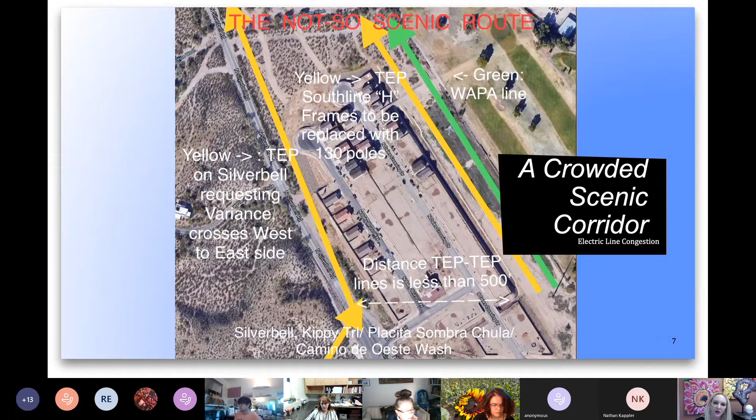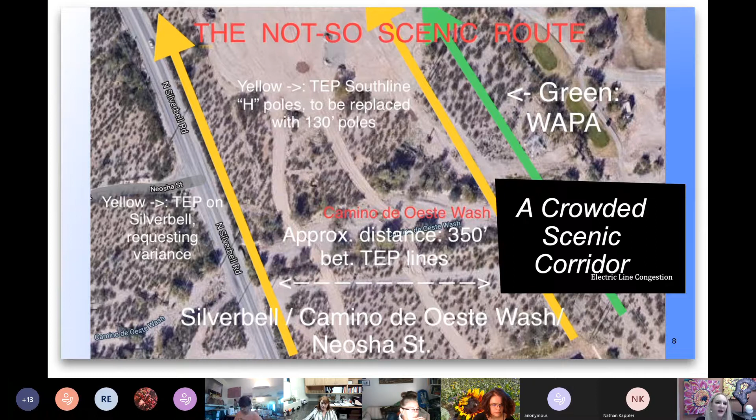This is how close these lines are to this neighborhood—they are right on the perimeter. This is just four rows of homes. The yellow lines are the TEP lines. This neighborhood is sandwiched by these electric lines. By the way, this is only 500 feet difference; right here it's only 350 feet difference between the two TEP lines. The yellow line is the Southline project, and right here is the Silverbell line, going north on Silverbell. The blue line is the widened road, which gets moved 35 feet.

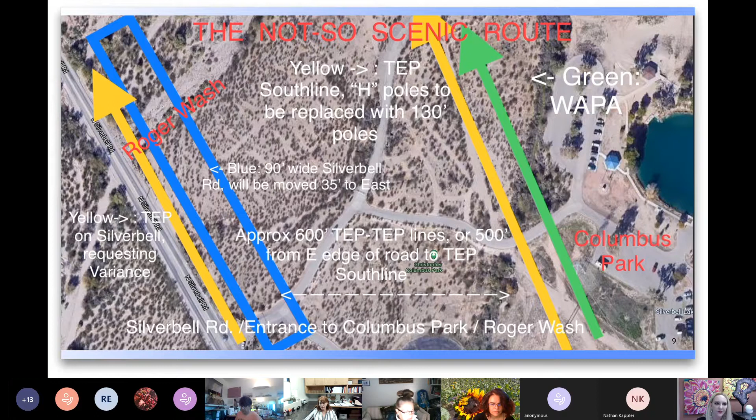It's going to get bigger and taller if we decide to give TEP this variance. This is the neighborhood. These poles and these monoliths here with the wires will get taller and will get more wires if you decide to give them this.

This is looking down on this neighborhood, and the poles will cross from the west side to the east side, and these are the transmission lines. This is what this neighborhood will get if this variance is granted. There's no hiding. There's no putting trees next to these poles to hide anything. This is what this neighborhood will get.

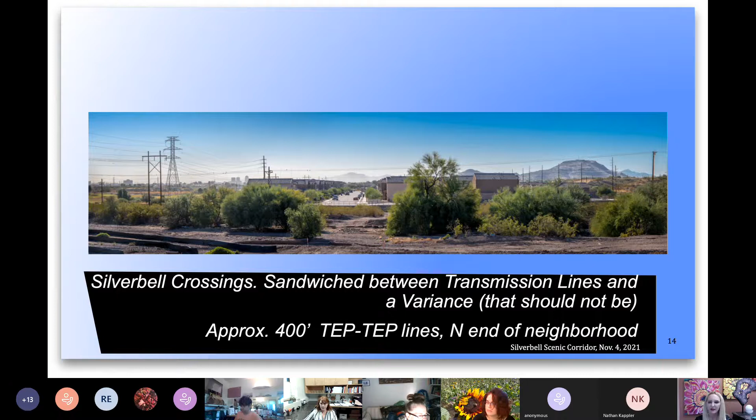This is this same neighborhood. These are the transmission lines to the left, to the east, and then those poles to the west will get closer to that neighborhood. This is what it looks like.

This is the scenic corridor. It's not scenic with poles there. There's no hiding it. We cannot hide these poles. This is the transmission line.

We cannot accept any more false premises or false excuses from TEP. They want an absolute exemption, and Tucsonans want the ordinance enforced. Let's get TEP's design and plan to underground. Tucson deserves better. I thank you for your time.

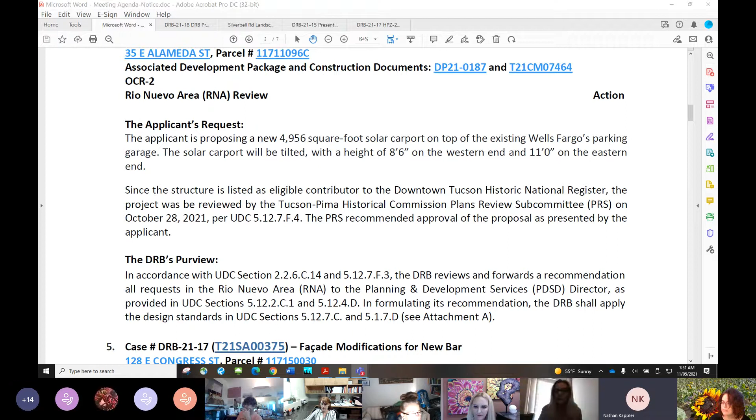Okay, so like Maria introduced the project, this is a solar canopy proposed at the Wells Fargo parking garage located at 35 East Alameda Street. The case number is DRB 2115. Joining me on the call from Ameresco today is Mark Hensel, who is the project manager, and I will turn it over to Mark to get started.

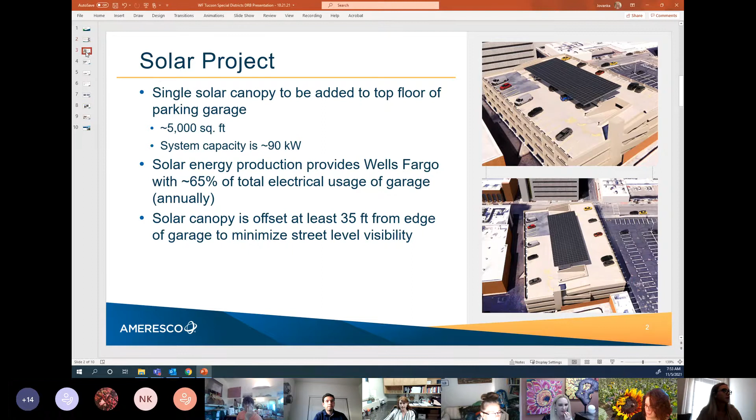Thanks, Mark. Backtracking a little to give some background on the site and parcel: it is a parking garage at 35 East Alameda Street. The primary use of the structure is to provide parking to Wells Fargo employees and customers that utilize the bank branch at 150 North Stone, across the alleyway. It is in an existing office commercial residential zone, and for reference I do have the parcel number and activity numbers of the development package and building permit, which are both in active review right now.

All parking garage access points are off of Alameda Street. The ingress location is here on the west side, and the egress is here. There's also an existing sidewalk on this side of Alameda Street. I just want to point out the alleyway in between is for authorized personnel only, so there's no public access there.

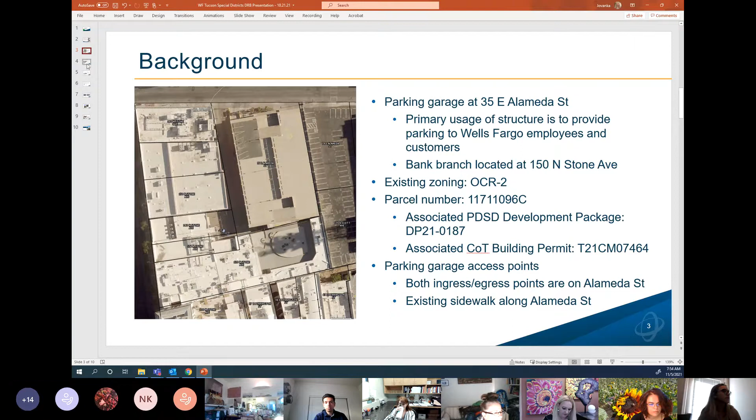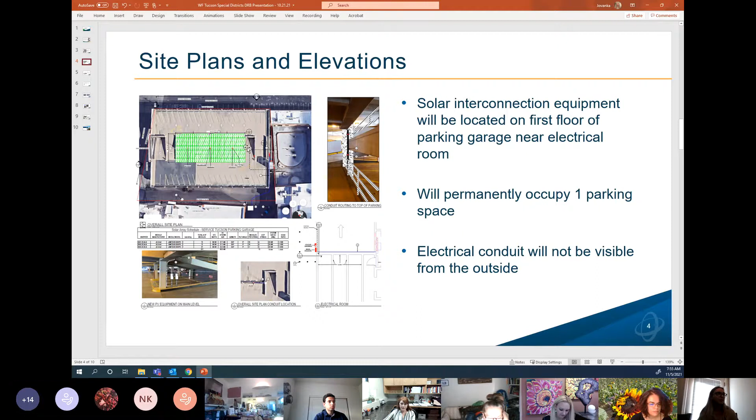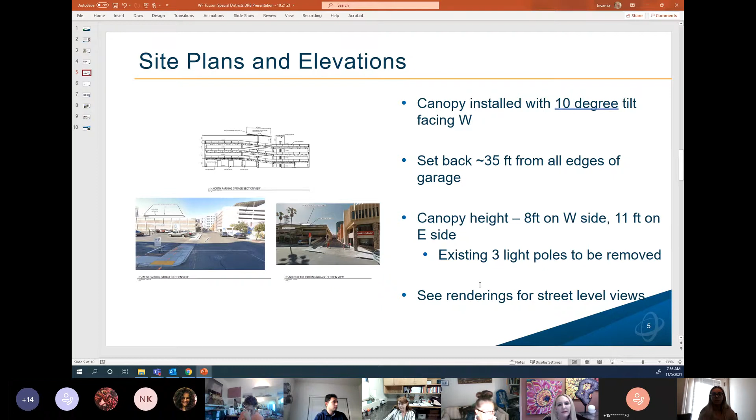We would have to remove the existing 3 light poles in the canopy location, and those light poles, for reference, are about 16 to 18 feet tall. So depending on how you look at it, we are kind of reducing height if you include the light poles in that. I do have renderings of the street level views included a bit later that I will go over.

Overall impacts of the project: like I mentioned earlier, we would only be occupying one space out of approximately 250 in the entire garage for the solar interconnection equipment, but all other spaces would remain open for public use. A shade study was asked for as part of the submittal, and Maria and I went back and forth to address that, so I thought I would address it here as well.

We will not be adding or removing any shade on public rights of way at street level. We would only be shading the top of the canopy. It's set back too far from the edges for the shadow to actually extend that far, so we wouldn't be impacting any shade on the street level.

I went over how much height it would be adding to the building, with the 8 feet and 11 feet added height to the existing structure. We would be bringing it up to 37 to 40 feet in total height. For reference, the neighboring buildings range anywhere from 35 to 77 feet, so we think it's pretty in line with what's already there.

We wouldn't be impacting the building facade. We're not adding or removing anything to the existing structure, just adding the canopy to the top floor. We would plan to paint the steel on the columns to match the existing building colors to make sure everything blends in. And as you can infer, we are not impacting any vehicular or pedestrian traffic patterns.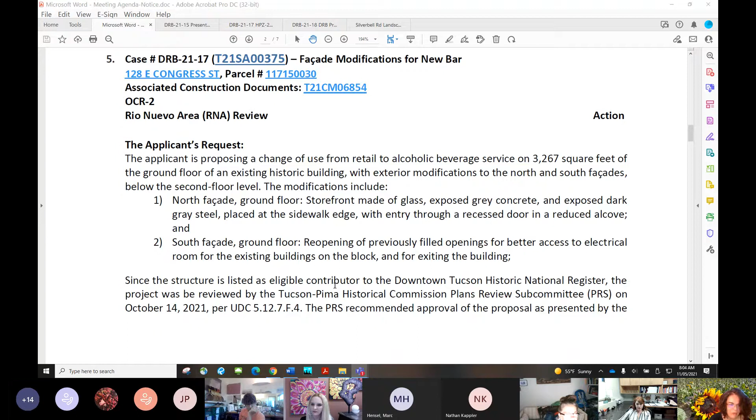Yes, Mr. Chair, members of the DRB, this is a facade modification to accommodate for a new bar on an existing historic building. The proposed modifications are just for the north facade and also for the south facade. The applicant is available for a presentation, and the structure is an eligible contributor to the Downtown Tucson Historic National Register.

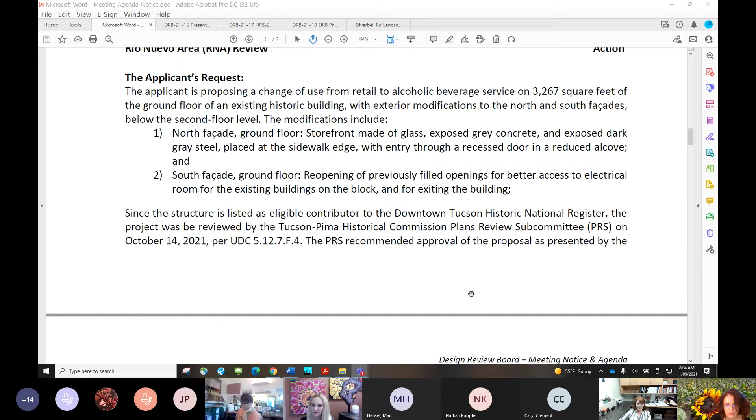It was reviewed by the PRS on October 14, and they recommended approval as presented by the applicant.

I'm Bill Mackey. I'm here to present the project. Let me share my screen. So you all see the screen?

Okay, so this is the project. It's at 128 East Congress. It's called the Gus Taylor Building. It was the sheet music portion of the old Chicago store. It was renovated a few years ago, and now it's being renovated again.

North facade, which faces Congress Street, we'll be working just below the second story windows only. And then on the back facade, again, it'll just be on the lower level.

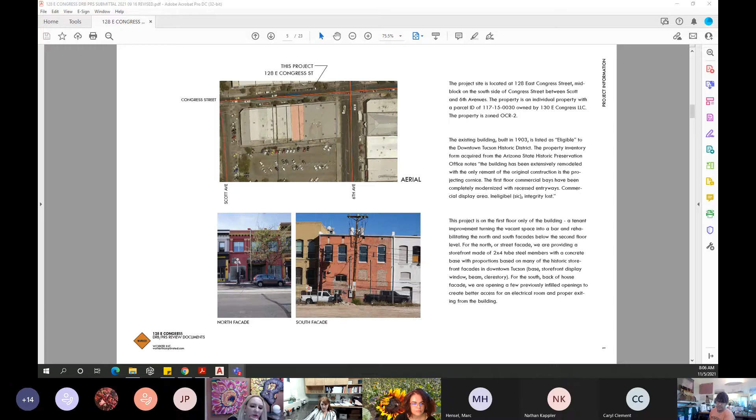So this is the general area, looking at the building from various views. Here it is from 6th and Congress, 6th and Broadway, looking to the northwest. We're looking at the building from the northwest to the southeast of the facade. And then here's the corner of 6th and Scott.

This doesn't matter to you guys, but here's the facade and the existing conditions. There's basically no historic fabric left below the second story windows, and we'll be tearing out all of it.

There are some existing beams and columns that we'll be keeping. This lower picture is the steel column located at each of the corner openings of the alcove that was created at some point. We'll be keeping those and the beams tying them together with the facade. There's some existing beams up here, and then this column continues on. But as you can see, the facade is in pretty poor shape.

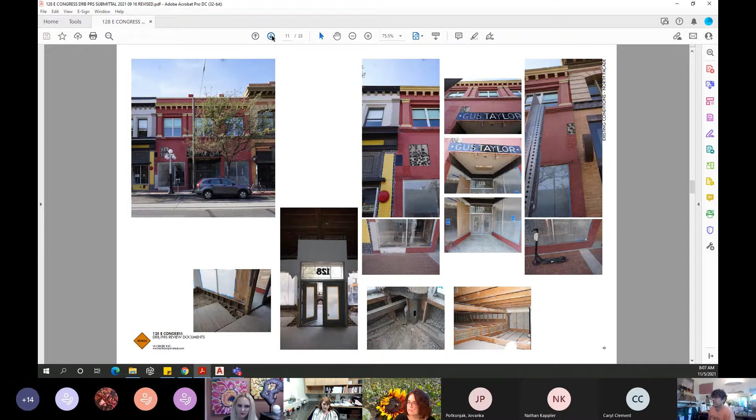And then in the back, it got a little confusing over time with this project. This project's been reviewed, I think, in the past by DRB and PRS, and the owner actually thought a portion of this had been approved, and we had changed plans midstream, so part of this has actually been constructed, and we apologize for that.

There were these existing openings on the far right, number 2 and number 3, and the intent is to take those openings and put in some doors. I have drawings for that. And so you can see this has already been done. This is opening number 3, and that was for a rework - there's an electrical room in there that covers the electrical for the entire block.

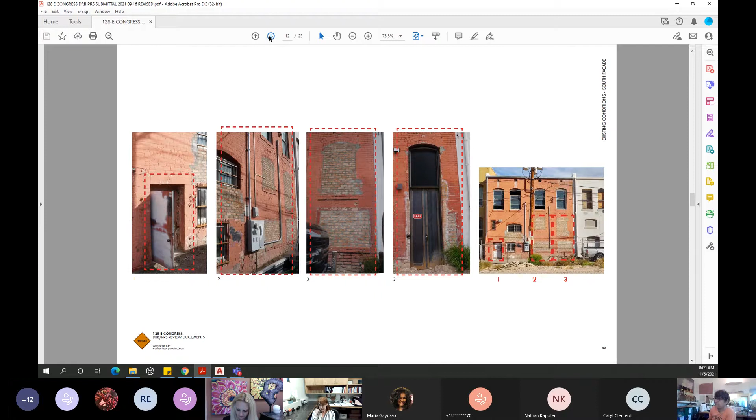That was done, and we were actually removing the poles along the alleyway, so Denise and everybody will probably be happy that we created underground electric for that portion of downtown. And then number 2 will be another opening similar to the electrical opening, for exiting from the building. Number 1 will just be boarded up - bricked up, sorry.

So here are the drawings. This is the site plan, and here are the floor plans and elevations.

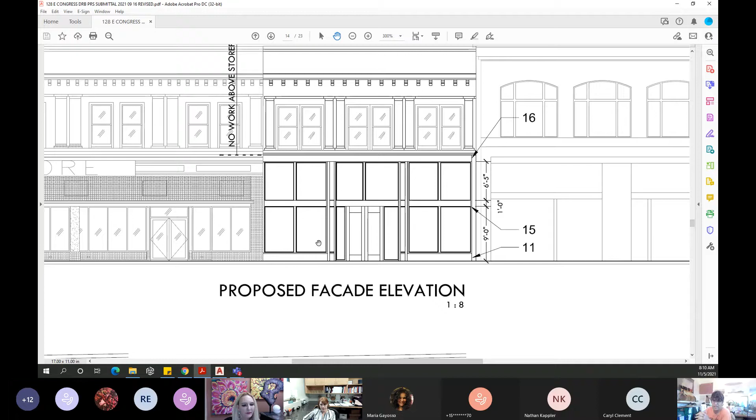So the proposed facade on the front is going to be the basic - we're going to go back with a concrete base that'll be sealed. Here's that existing column, and then on top of the concrete base, in between the existing columns, will be tube steel window assemblies and tube steel beams, similar to what we did at the Arizona across from the Ronstadt Center, or at Time Market - similar kind of construction.

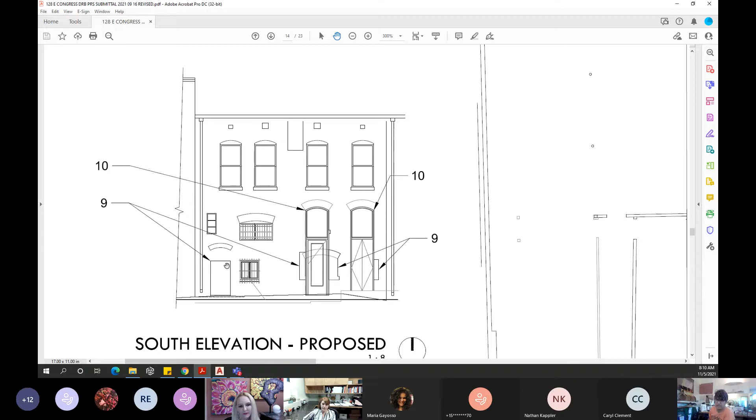And then on the back facade, here's the portion that you saw that we accidentally did too soon. The new exit door will be similar, with a full light in the door with glazing above it, and then we'll brick in the existing exit door, which is, I think, only 5'4" high - can't remember how low it is, but.

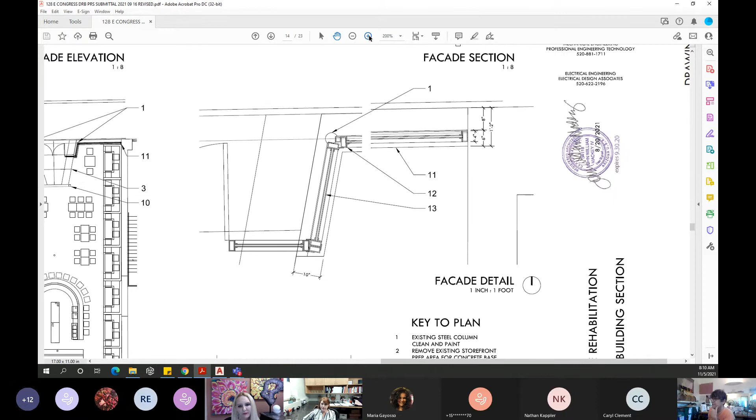And then, to give you a little sense of the detail, this is basically how this will work. Here, number 1, this little shape is that...

Bill, your audio cut out somehow.

How about now? That's better. Okay, the one big change on this, other than redoing the facade, is the alcove is going to be shortened. As you can see here, it's quite deep, the existing alcove with the terrazzo floor. We're going to bring it in to this joint line right here, and the terrazzo will stay, and the wood floors will go up to it.

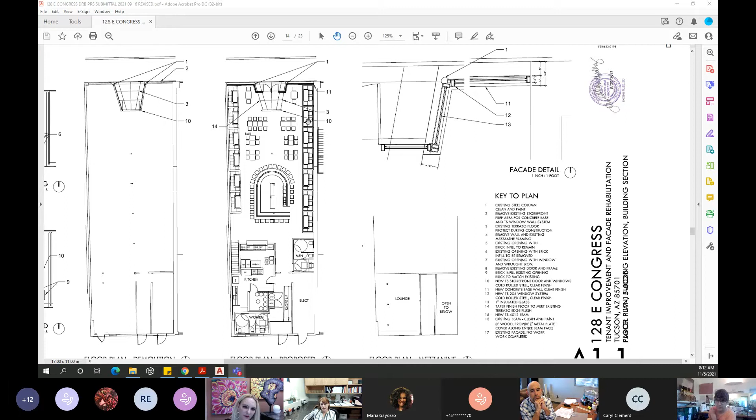There will be some existing columns that'll stay, but we're pulling it in. And that was a little bit of a discussion with the Historic Commission, is the alcove precious, whatever. Throughout the history of this building, like all other buildings in downtown, those alcoves move back and forth over time. Sometimes they're deeper, sometimes they're shallower.

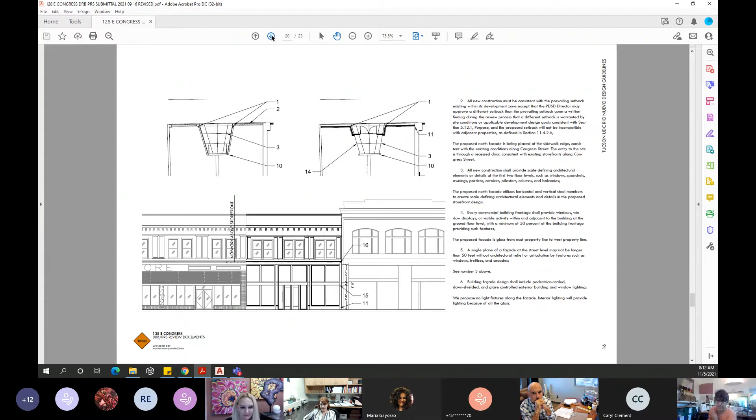So we're going into the shallow alcove phase of downtown Tucson right now. And then the rest of the thing is meeting the DRB, the Rio Nuevo guidelines, just walking through that, the development zone. If you guys read through the package, you can see it kind of follows everything that Rio Nuevo wants. So even the shading. That's it.

Thank you, Bill. I do like the presentation when all the points for Rio Nuevo are addressed in it. It makes our job a lot easier. Any comments from the Design Review Board?

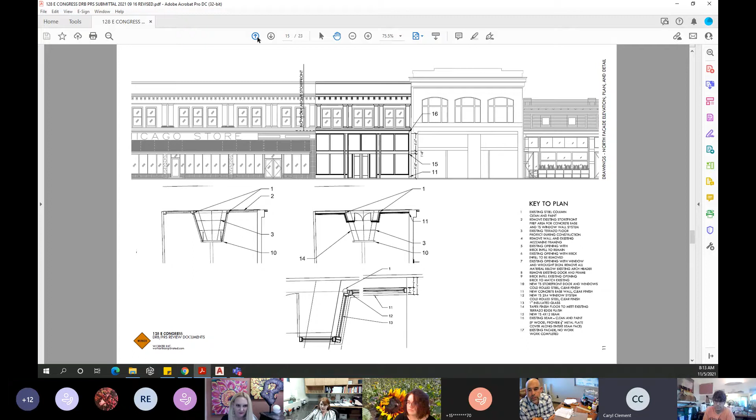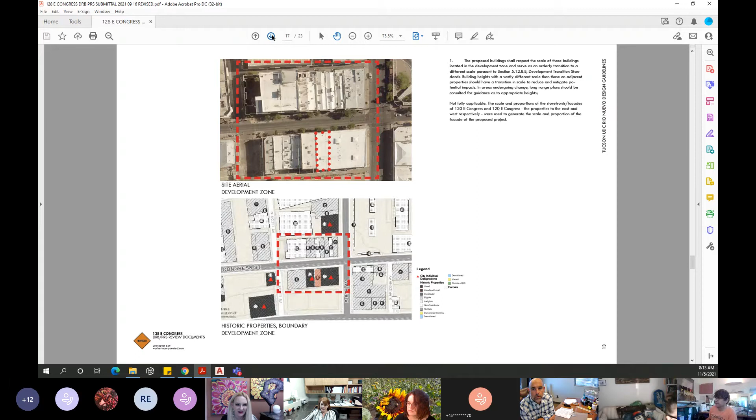Bill, could you put your last slide up that had the Rio Nuevo points on it? Well, it's the last few slides. So number 1 is here, talking about the development zone, 2 through 6 here. Is there any point? I mean, you've made the shade study.

That's usually something people leave out, but you never do. Thank you for that, and it looks like you're achieving it. How do you achieve the shade? Is it just already there? It's a north facade. Right. So north facades are pretty good.

Mr. Chair, members of the DRB, just wanted to let you know, staff and... you want to provide a quick feedback on the status of the modifications on the shade requirements? I guess they're not available, but yeah, we're working on it, Bill.

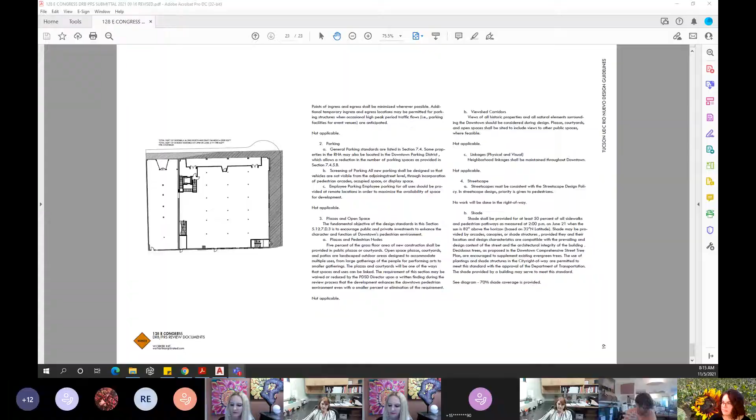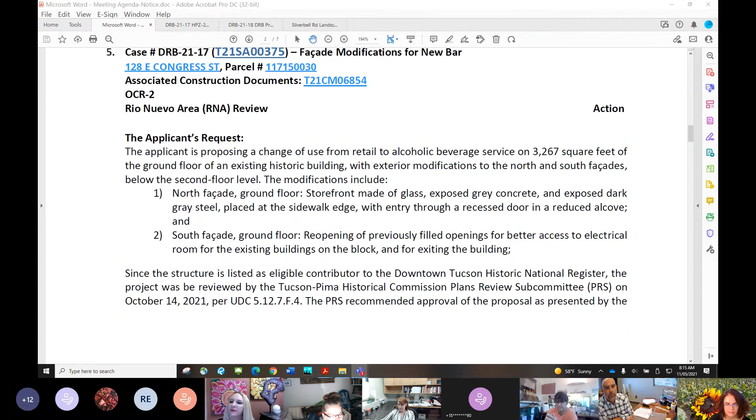All right, well, if there's no points that the DRB would like to raise on this, then maybe we can put the motion on the screen and someone can make a motion here. Mr. Chairman, I'll make a motion. Great. The Design Review Board has reviewed the applicant's project for compliance with Rio Nuevo Area Design Criteria and recommends to the Planning and Development Services Director approval, finding the project in compliance with the building design standards set forth in UDC sections

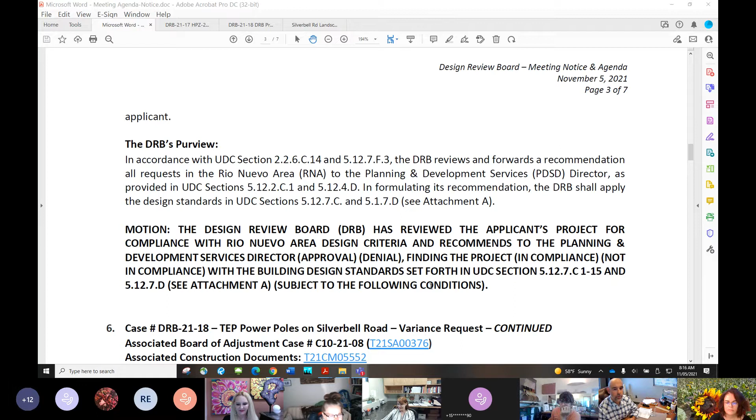5.12.7.C1-15 and 5.12.7.D with no conditions. I will second the motion. Motion has been seconded. All right, I will call for a vote. All in favor say aye. Raise your hand. Aye. Aye. Aye. The motion passes.

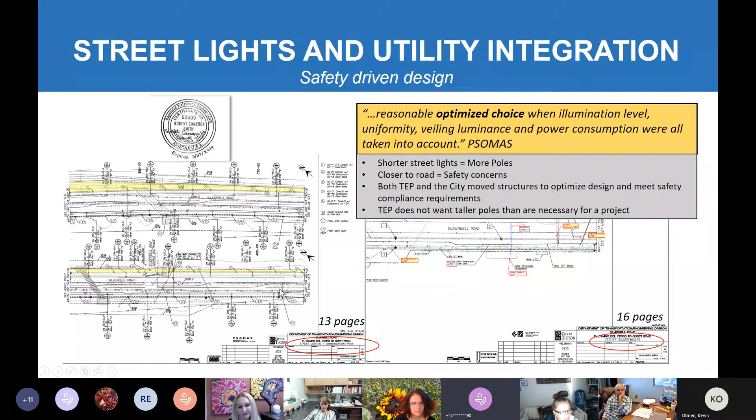Regarding safety and structure height, there's a relationship between TEP power pole height and the existing streetlight design. Two items worth considering here are called Sag and Sway, or Sway is sometimes referred to as blowout. Sag is the line dropping during various loading conditions.

These items were all taken into consideration through in-depth, detailed engineering, and therefore the power poles as planned are optimized for height. We had discussions with our engineer to confirm that the initial request for TEP poles was actually taller than the current design, because the city wanted clearance for replacing streetlights and doing maintenance.

We worked through a number of engineering designs to arrive at a pole height lower than originally requested, but still meeting safety requirements for city crews maintaining streetlights and working on structures near power lines. So those pole heights for both streetlights and power poles have been optimized, and there's been recent discussion.

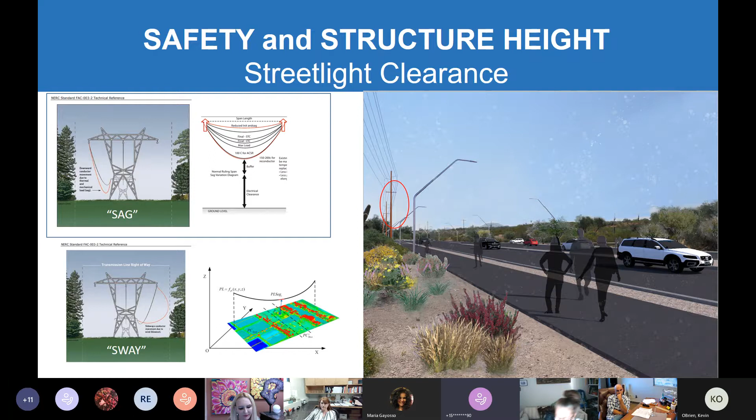The blue dots are TEP structures planned for installation. The orange dots are TEP structures that will be removed. The native plant inventory points are seen in the green features, various triangle, circle, and diamond shapes. This shows where TEP structures are in relation to the native plant preservation plan.

Looking at the attribute table from the native plant inventory, it provides guidance on whether a plant would be preserved in place, transplanted on site, or removed from site. The TEP will coordinate and collaborate with this native plant inventory for all of our work to ensure native plant preservation is implemented according to plan.

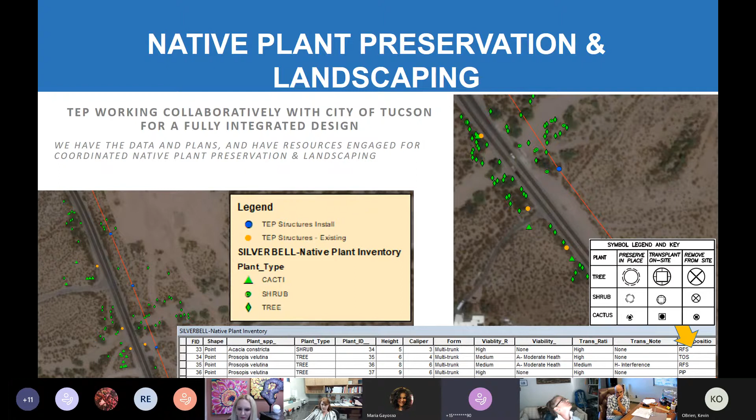Subsequently with the landscaping plan, this illustrates where TEP poles are integrated into the plan, and a full complete plan set was provided as well. This shows that TEP is in fact working collaboratively with the city for this fully integrated design, and hopefully this landscaping plan with TEP poles helps more clearly illustrate that, per your recommendation.

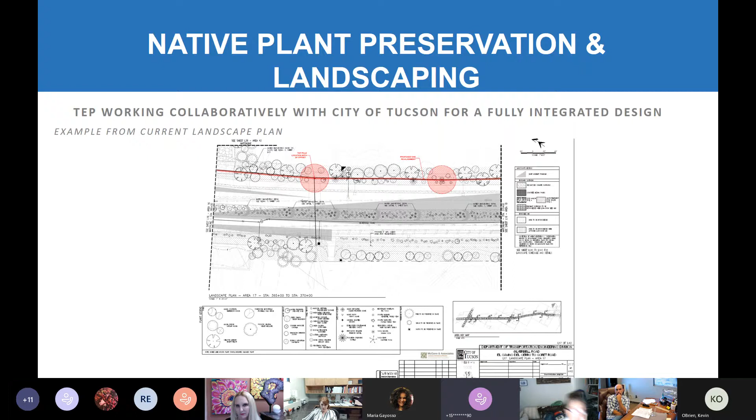Just in closing, I wanted to touch base on those two items that were a continuation from previous discussion, and reiterate several key points: the project stakeholders have worked collaboratively together to develop this integrated plan, and this has occurred over the course of many years.

The overall plan will improve the safety, functionality, and aesthetics of Silverbell Road. The utility infrastructure is fully integrated with the transportation design and will ultimately provide a more cohesive, consistent, and modernized Silverbell Road corridor. A key point from the previous meeting was conveyed by Ruslan, I believe.

The Scenic Corridor Ordinance was enacted without consideration of the archaeological resources, and it was likely not the intent to force undergrounding where doing so impacts ancestral or other archaeological resources. For these reasons, we feel the current design, per your additional requirements should you have any today, is the optimized design and best fit for the project.

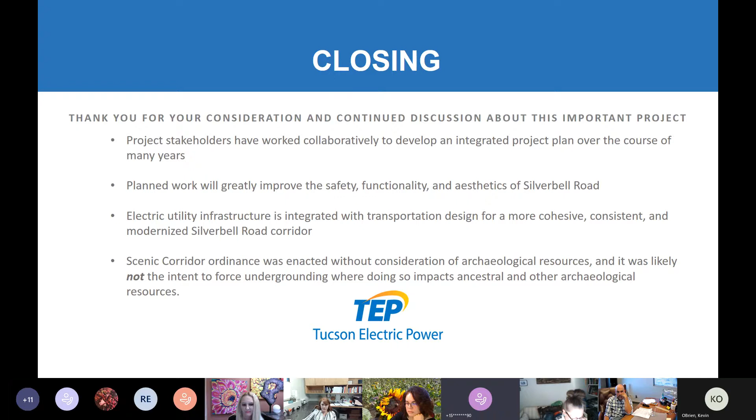So we welcome your continued recommendations should you have any, and appreciate your time today as well as on the previous DRB meeting. With that, I'll open it up for questions.

Thank you, Kevin. Carol, your hand is up. Yes, Mr. Applicant, could you put the typical section on screen, or Maria?

The typical roadway section that was sent out a couple days ago. Yes, I can pull that up. Thank you, Mr. O'Brien. Okay.

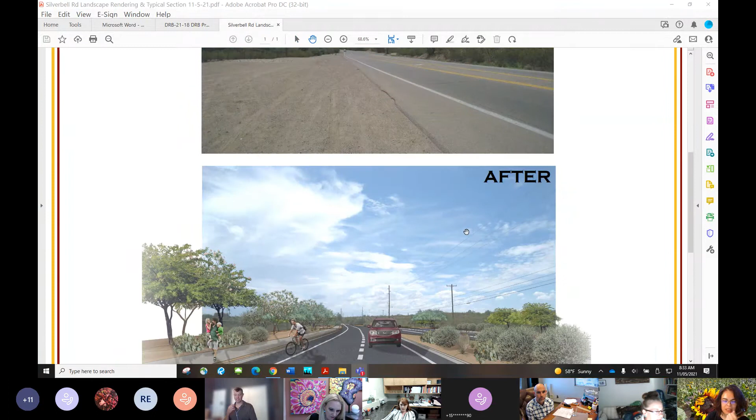Okay, there we go. All right. I think there was somewhat of a misunderstanding regarding the native plant preservation ordinance.

I wasn't so concerned about that as I was with the integration of the proposed new landscaping with the TEP poles, and therefore I asked for a set of plans showing the location of the TEP poles, which you did indeed provide. What I want to talk about here with the typical section, mind you, this is a typical section.

Is that we understand the many constraints associated with this project. Due to the archaeological study, the requested variance of above-ground utilities has been requested. Given this, I'm hoping with my comments to improve the experience of the multi-use path users.

First of all, I asked last time, why can't the multi-use path meander away from the edge of travel lane, away from the roadway? I looked at the set of plans. You can see it in this typical section. It's just a 2-foot no man's land offset from edge of curb or edge of travel lane, whatever you want to call it, 6 foot wide, and then landscaping there.

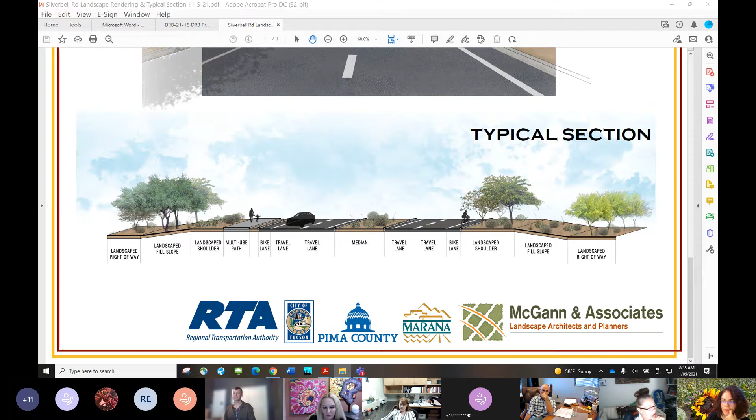I did look at the plans, and if we could go to the set of plans now that show in greater detail the roadway layout. Thank you. I would like to point out where I think the path can be meandered away from the roadway, improving the experience of the user groups.

Now I want to see the plans. Let's forget sheet 1, let's go where it jumps to the east side, let's go to sheet 2. This is going to be hard to see, but I looked at these plans closely.

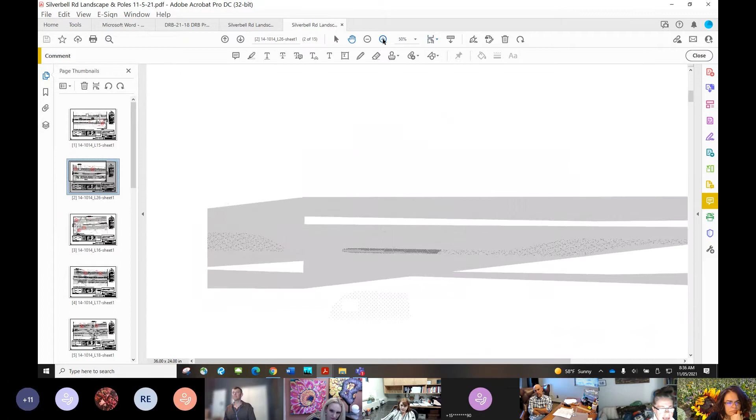On these plans, I do not see the right-of-way line on the northern part of the project. I have a feeling that the right-of-way line extends beyond. Can you point out to me where your right-of-way line is on this drawing? Because I'm going to be asking, can we meander the multi-use path away from the roadway and set it up so that it's a better experience for the user groups, since that would allow shade trees on the south side of the pathway, providing shaded, healthy, walkable pathways. So my first question is, where is the right-of-way line on this plan?

Kevin, I can stop sharing my screen if you want to share yours, if it's easier. No, that's fine. I think the right-of-way, while not labeled, appears to coincide with the dotted portion of that graphic. I don't think so. I don't think it's where the hydro seeding is going. I think the right-of-way line is outside of that. Because if I look up project, you have native preservation plants extending beyond. I don't think the right-of-way line is the fill, I think it extends beyond.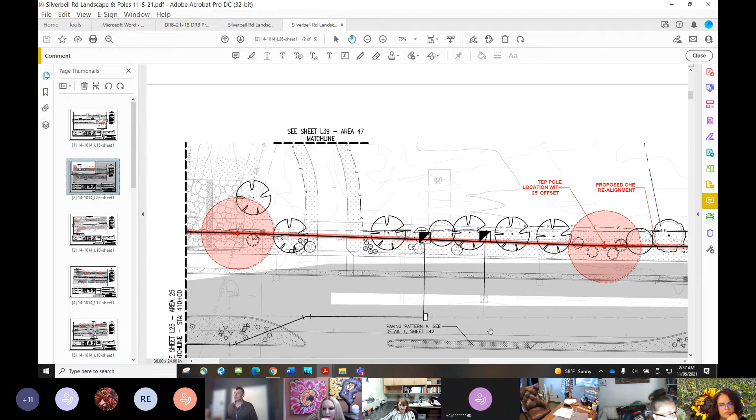I could answer that, this is Scott Martinez with McGann Associates. As you know, with these projects there's lots of improvements in driveways. In this one, it's pretty close to the fill line in here. It's the dash line with the two short dashes, right along there. It varies throughout the project, but in general, that's our project limits.

If we go up station on the project documents, it does vary further out. Is there a possibility to meander the path away from the roadway? Again, trying to improve the experience for the user groups and get the opportunity for shade onto the pathway. In other words, locating the trees to the south of the pathway, rather than the pathway at a 3-foot offset from face of curb.

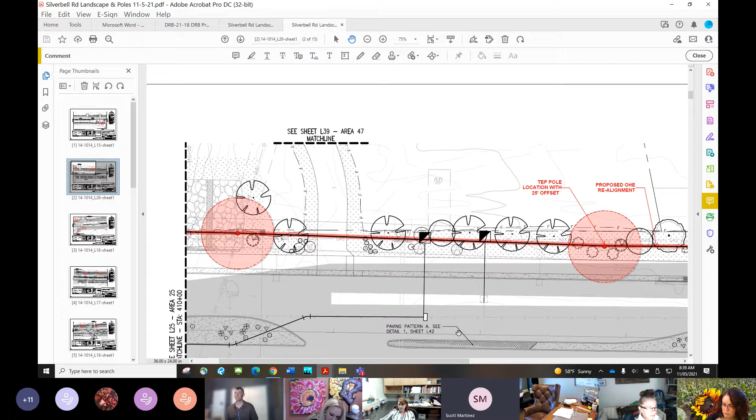One of the issues we have is our clear zone. I don't know that it's mandated for this project, but from the travel lane closest to the pathway, we have a 20-foot offset. I know Nate likes to hear offsets, but that's ours. The clear zone is a 20-foot clear zone from travel lane? From the edge of the travel lane. So where we have a bike lane, the bike lane is not included in that. Correct, but to the travel lane closest to the walkway or to the curb.

And is that for the multi-use path or for trees? It's for trees, to avoid any collisions. I understand, gotcha. Well, just going up station, there seems to be space where the path could meander away and shaded walkable pathways could be provided. I don't feel like the entire length of the project has been closely examined with this in mind.

I think even the engineer can help me with this one, but I think we're trying, in our section, to limit the amount of disturbance to the existing. Well, you still have in your section your landscape fill slope. Yeah, that might have to be moved further out, you might have to bring in more fill. But yeah, there are ways to do that.

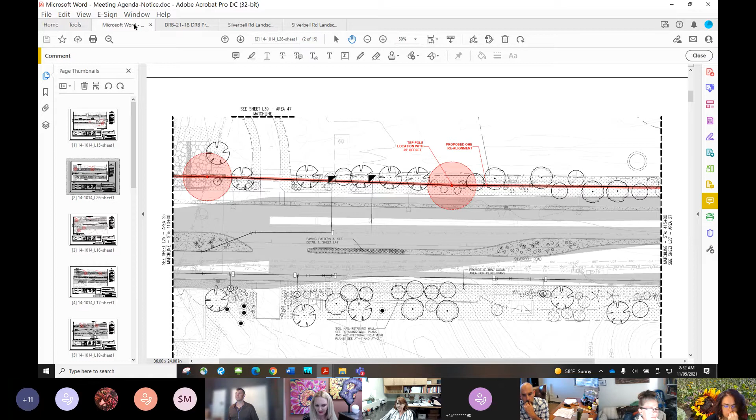Pardon me, this is Denise Baldwin speaking. I think the true question is: has it been considered, since this is a fill project, that the design and plans by TEP would be pushed forward to include their designs with the fill? This incremental difference in cost seems like this is to protect the archaeological artifacts. This seems like if we're going to have TEP underground, this is really the best case scenario, because it's already there. They don't have to even bury—they just have to get their lines, their encasements on the ground, and then have the fill put around them. That's been brought up by the board already, and reconfiguring the collaborative planning, it has been there. So this is the question the board needs to be looking at: has that plan been submitted and worked with TEP? I would submit that question to TEP.

Okay. Thank you for the public comments.

Members of the board, if I might interject, this is Russlin. This is a public meeting, not a public hearing, and the call to the audience is closed. This is now the time for the board to have a discussion with the applicant, not a meeting where the public addresses the applicant. So I just want to clarify, point of order, that is not the proper procedure for this type of hearing. Thank you. Ms. Wells, I was about to make that same finer point.

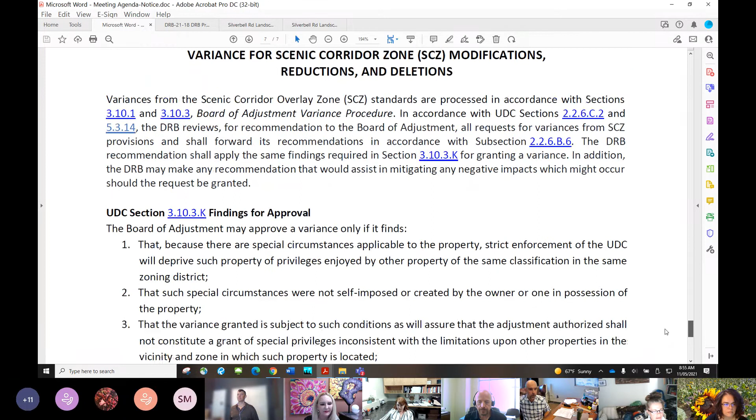Oh yeah, I think it's down at the bottom there. So we've discussed all 7 of these twice now. This is our 3rd time.

It's not a special circumstance—that because there are special circumstances, strict enforcement of the UDC will deprive such property of privileges. Sometimes it's hard to read the language, but my sense is that the viewshed zoning was not specific, but general to many locations, and it did not contemplate the exact conditions of this project, which include the archaeological resources. When we saw the exhibit showing the civilizations right underneath the ground, it was clear to me that the viewshed did not contemplate that in their blanket recommendations.

Second, special circumstances were not self-imposed. The project was imposed by the will of the people, I guess, in a vote. We all voted for improving this road. So TEP is not creating their own project here, but they are impacted by the voters voting on this road.

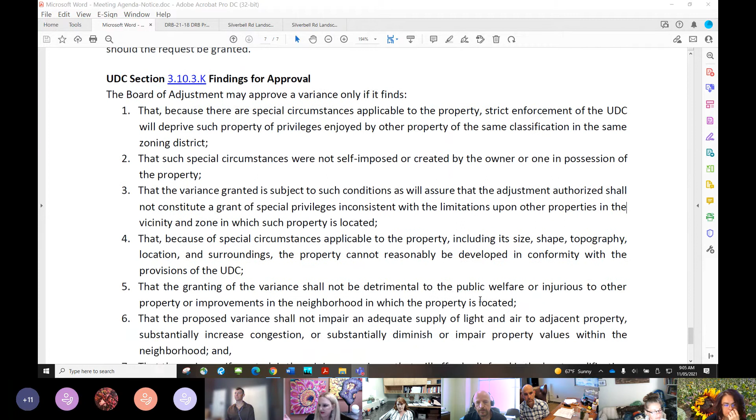And everybody is saying, well, we would like to have these lines underground, but now TEP is saying, well, here are the facts. And they're befuddled because they feel that this is what they have to live with, and that's not... There have been some meetings in the past with the public.

Yes, right in September of this year they had a neighborhood meeting describing what happened, or what they are going to be living with, and that was their information. So if you consider that...

...participation, okay, but does that do it for you? Right, well, I don't—it's only a point of, thank you, Denise. It's only a point of curiosity because if you notice points 1 through 7, it doesn't say adequate public participation. So that's not sort of the lens and the job description that we have here this morning.

What about point number 5, Nathan? The granting of the variance shall not be detrimental to the public welfare or injurious to other property or improvements in the neighborhood in which the property is located.

I think that, Miss Denise, I'm sorry if I have your name wrong, when she showed that section of neighborhood sandwiched between these giant power poles, it is slightly ridiculous.

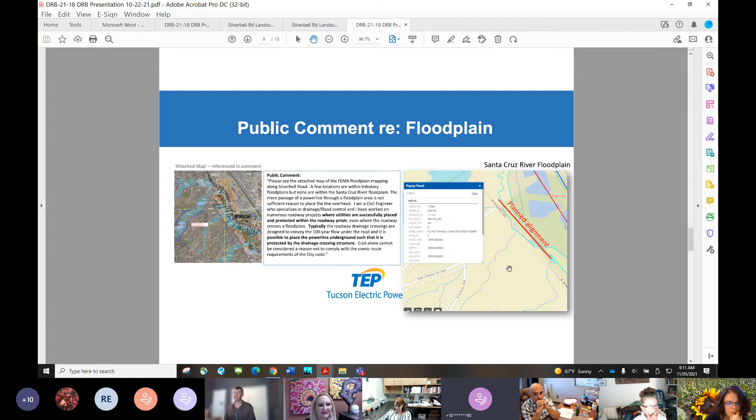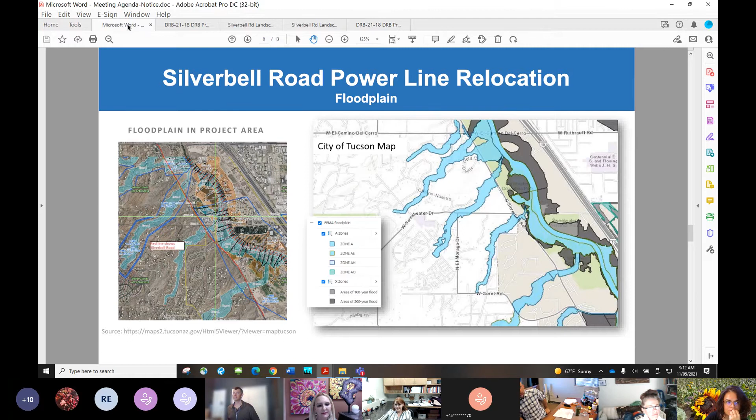This is a question I want to ask the DRB. I know it's going to be tempting for the public to jump in, but I don't want the public to jump in. The question is, are these poles detrimental to public welfare? That's my first question. And do they injure? That's my second question. How is it detrimental to the public welfare, the welfare being the well-being and safety of the public? In other words, you can't have a variance that creates a danger to the public, or you can't give a variance that would open a nuclear waste facility right next to the public. That would be a clear detriment to public welfare and injurious to neighboring properties. So how are power poles in that category, in your mind, Carol and Rosemary, detrimental to the public welfare and injurious to properties?

Full disclosure, I live with power poles in my alleyway. I don't feel injured by that, and I don't feel it's detrimental to the people in my household that there are power poles in my alleyway.

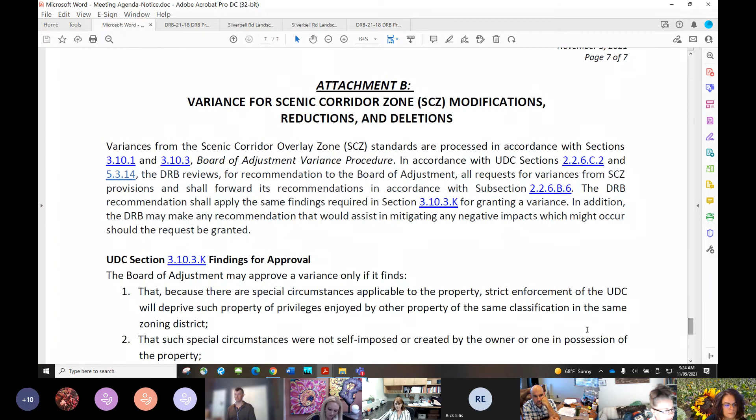It's a good point, Rosemary. I would like to say that I feel like the neighborhood owners and stakeholders were not fully integrated into this process. Maria, could you go down to number 5 on the variance criteria? Given number 5 and 6, I feel that this variance will diminish and impair property values and also will be somewhat injurious to the neighborhood. So I am leaning towards opposition to the variance, especially given that the option of moving their poles over to the more eastern corridor, I do not feel has been fully vetted or taken out of this project—it's another project.

If I could speak to that briefly, because there has been public involvement. The Tucson Mountain Association webpage has a link to the Silverbell Corridor project. If you'd like, I could share my screen for context.

No worries. It sounds like to me that plans were brought to the neighborhood association already done. There was just sort of, you were wanting their stamp of approval without their true involvement.

No, this goes back to 2010. There's a link on the webpage with information that goes back to the Silverbell Road info, and links that go back to the project page, which has information speaking to the project as a whole going back multiple years. That's been available to the public on their webpage and other webpages. So I think it's fair to say there's been a substantial amount of public outreach and online information available for this project.

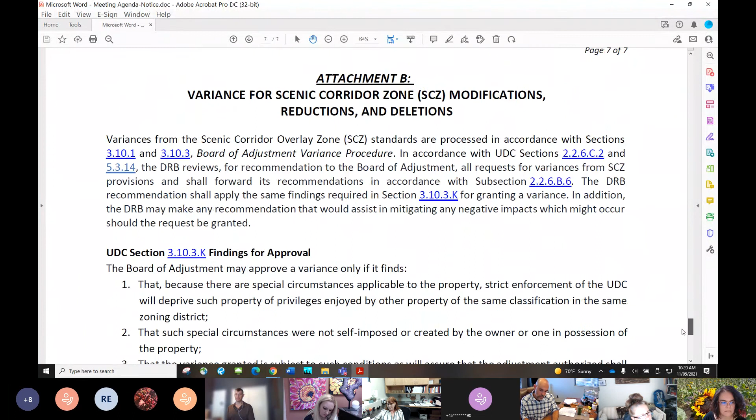So we would find them in compliance with the criteria subject to the following conditions: the multi-use path to have 50% shade, to be designed with 50% shade. You have to do the date thing, or else that doesn't mean anything. At whatever our wording is, solar noon, whatever the time is, right? Oh right, at the summer solstice, yep. Okay, so that's one condition, the multi-use path, 50% shade at solar noon on June 21st.

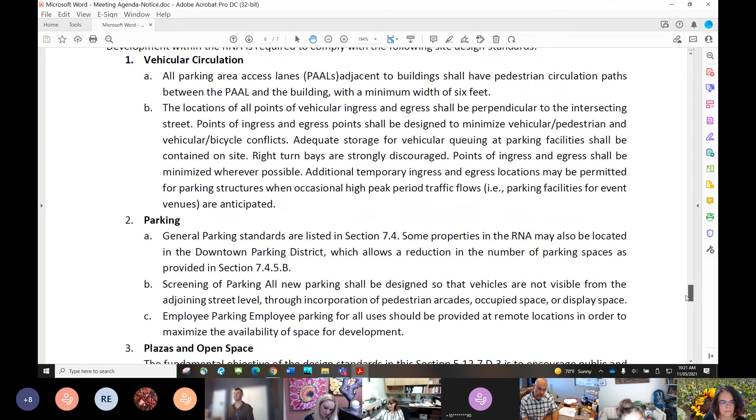We would like to see drinking fountains, including little dog fountains at the base, and workout equipment. I don't know about workout equipment, Nathan. I've done that with projects, and it just gets old and disrepaired, and people don't really use it. I would rather see the money go to a call to artists of 1% of the construction budget.

That might already be in place, but I don't think it is, Mr. Applicant, is it? There is an art component to the Silverbell corridor design, and I don't know the percent of budget, but there is an art component. I know there has been interest in the past, and that may be something that the transportation project could consider. Okay, so a portion of the project, and I'll say for example 1%, which is going to be a huge number. Yeah, that's typical on roadway projects. Yep, get set aside to public art to improve the corridor.

Can we specify that the areas of greatest impact, for example the neighborhood that's being sandwiched there, receives a public art feature nearby?